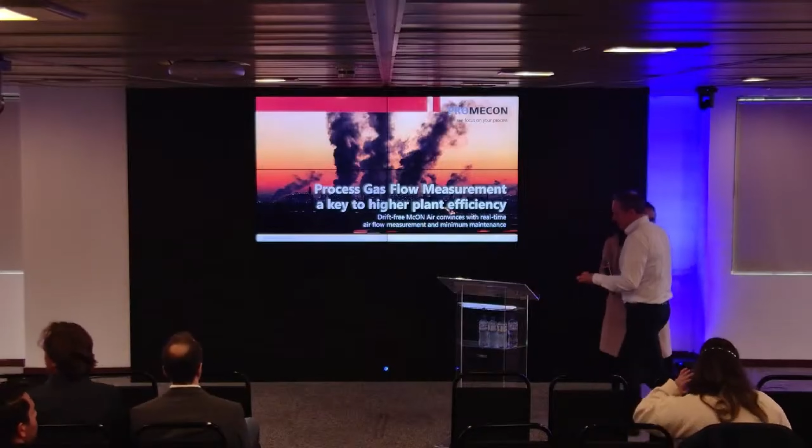Well, thank you very much for coming here. Thank you for your time. I know that you also have other things to do. Very happy to be here. First of all, I would like to say thank you to Carlos, C2E in Brazil, for providing this wonderful venue and also inviting all the people. Also for providing us the access to the Centec show, which was great.

And today, indeed, I want to talk about optimization of thermal process. And the focus will be on process gas flow. Now, this is a very wide field. When I read the title, I said you can actually talk many days about this because there are many types of optimization you can do. So I will try to pick out some important process parameters in some industries that might be of interest to you.

Now, I would like, before I start, maybe you can raise your hand if I call up certain industries. Anyone from the cement industry here? Anyone from pulp and paper? Okay. Anyone from glass? No one from glass. Anyone from power? Which other industries come to mind? Steel making, metallurgy. Okay, very interesting.

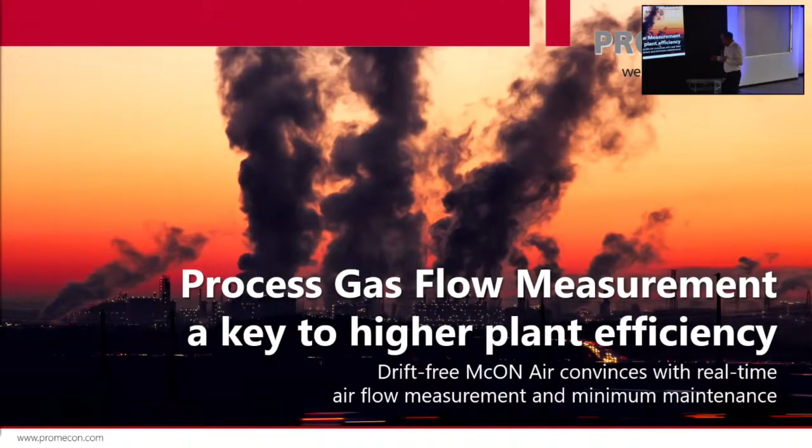Our company is basically doing process gas flow measurement. That's pretty much our DNA. We do process gas. We were started in 1995, so we have a 30-year anniversary, and tonight we'll have a little bit of a party with some of our partners that joined us here from South America. And we are located not far away from the city of Berlin, about 1 hour west of Berlin in Germany. And we are providing the measurement of process gas for these industries that you can see here.

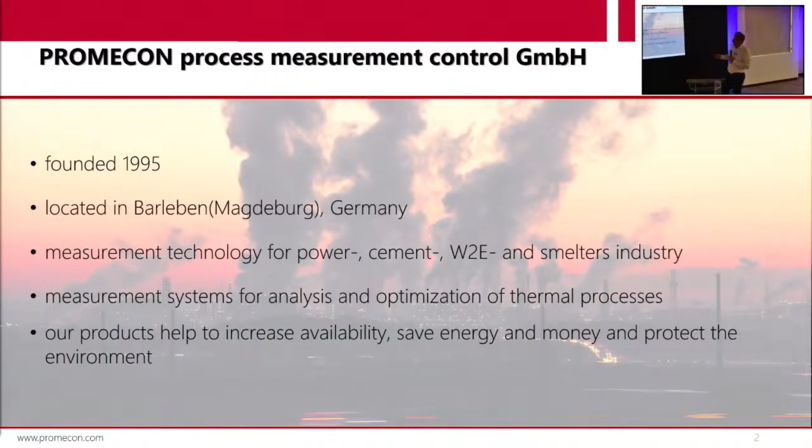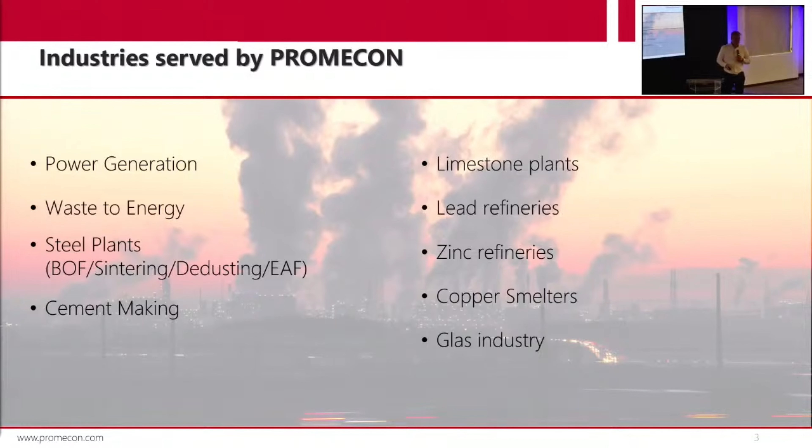Basically, we started in power generation, measuring the combustion air to large boilers, to large furnaces. But also, we expanded our activities to cement, to lime production, to steel, but also to non-ferrous metallurgy, so copper, zinc, lead. The main industries that we have been into so far are basically power, steel, and cement.

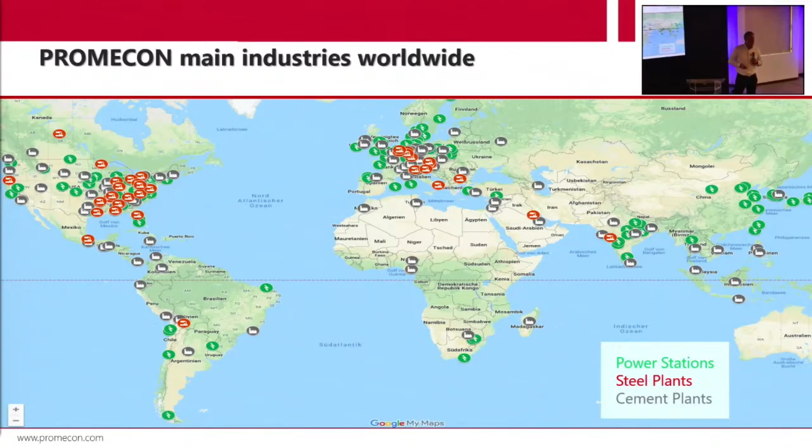This is the big one. But when I say power, it's also boilers, industrial boilers. So if you have a paper plant, you have a black liquor boiler or whatever, that would be a similar thing. Waste heat recovery boiler, same thing, right? And you can see we have been focusing a lot on Europe, a lot on North America. You can see that South America is still a very blank spot on the map. And I'm here today to change that. We would like to sell more in South America. Brazil is a very big economy, but other economies as well are very highly attractive to us.

Now, I would like, first of all, to address a little bit more precisely what is process gas. You can define anything as process gas. For us, it means gas that has high temperature, gas that contains particulate matter, so dust or some medium, and gas that goes through a large duct. When I say large duct, I mean large cross-section in relation to the length of the pipe. Why is that typical? Because usually in the heavy industries, you move a lot of gas, you move a lot of air, and you move this air at a very low density because it's very hot. So you need very big piping to transport that.

And if you want to know how much goes through that pipe, simple question, very difficult answer. It's very difficult to measure process gas.

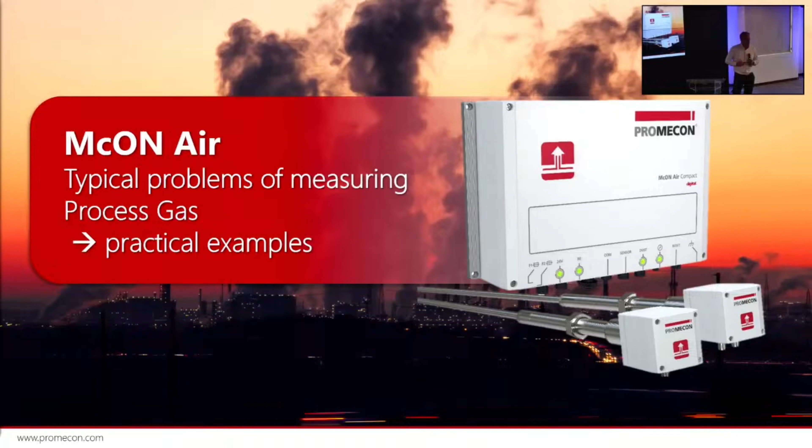We just had a project in South Africa where somebody had an 800 megawatt boiler, and they said we would like to know how much gas comes out of this boiler. This is a monster issue. It's a huge project. You have to measure 30, 40 points. You have big concentration of fly ash in the gas. And of course, if you want to look at the boiler efficiency, you have to get accuracies way below 1%. Very difficult, right? And in all other processes, it's very similar. So that's really what we have specialized in over the lifetime of our company.

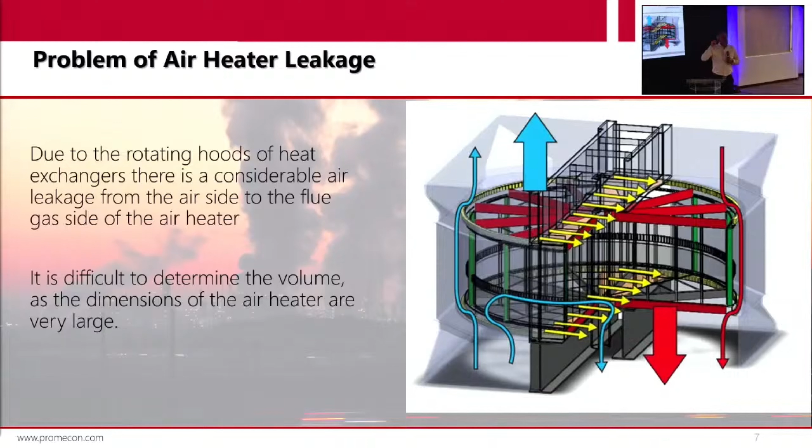And this is just one example. There are many others, but a very prominent example. You have a large boiler. You would like to put combustion air into your boiler. In order to have a high efficiency, you preheat the gas or the air with a rotary air heater. Now, the rotary air heater puts the heat from the flue gas back into your fresh air. But it also puts a lot of ash and dust from the flue gas into your air. And so all of a sudden, your air is full of particles. And these particles make it very hard to measure it. How would you normally measure air?

Most of the time, people just take a delta P measurement. So they have a venturi, they have an Annubar, they have an airfoil, something where they can use the Bernoulli equation in order to calculate the flow out of the pressure. Now, the typical example for a power station would be you have a venturi, you have a pressure tap upstream the venturi, and you have one pressure tap on the venturi, like right here. And out of the difference, you measure the flow. Now, the thing is that the pressure transmitter gives you a delta P, typically 20 millibar. This is not a lot. That's a very small pressure.

The whole thing is floating on the barometric pressure in this room. How much is barometric pressure? It's 1,000 millibar. So you have a very high barometric pressure, and you're just measuring a small difference. Why is that a problem?

Well, think of the dust I've been talking about. You have dust in the air. When you turn this boiler on and off, the dust would get cold. It would go below dew point. It would clog. This thing can completely jam. So your impulse line is completely jammed. And now all of a sudden you measure this pressure against barometric pressure. So if one leg is blocked and you have a thunderstorm coming, your barometric pressure changes from 1,030 millibar to 1,010 millibar, 20 millibar. That's the full scale of what you want to see.

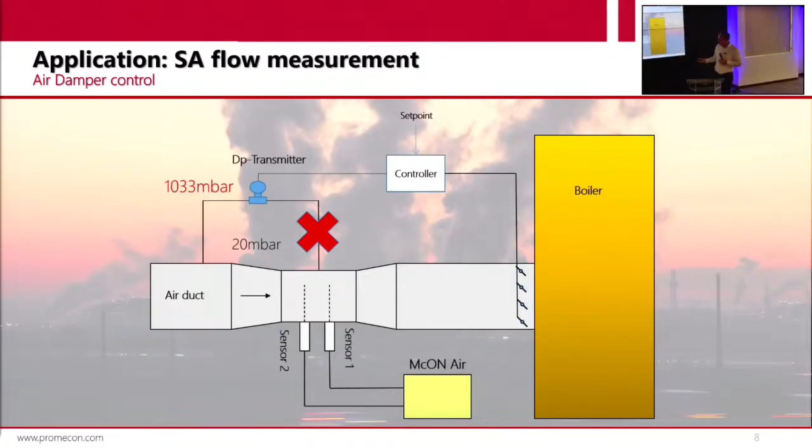If I go to a power station with 20 secondary air readings, then I'll see that the dampers are all over the place. And the flames are all different. Every burner has a different problem. And that's because all of the airflows are wrong. And this is what's costing you a lot of energy. It doesn't matter which process. If you go to a cement plant, you have a large mill, same problem. The raw mill has some airflow. Is it correct?

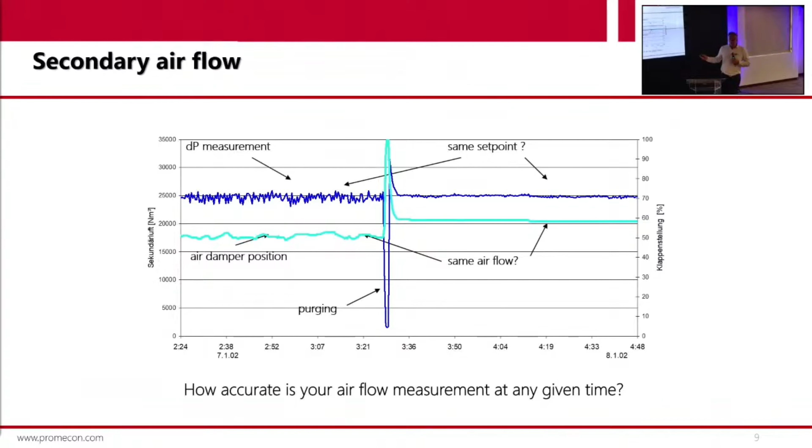Our measurement is a digital flow measurement that will never drift. Our measurement holds the calibration over the life of the system. If you buy this system, you will never have to recalibrate it. And I will explain in a minute why.

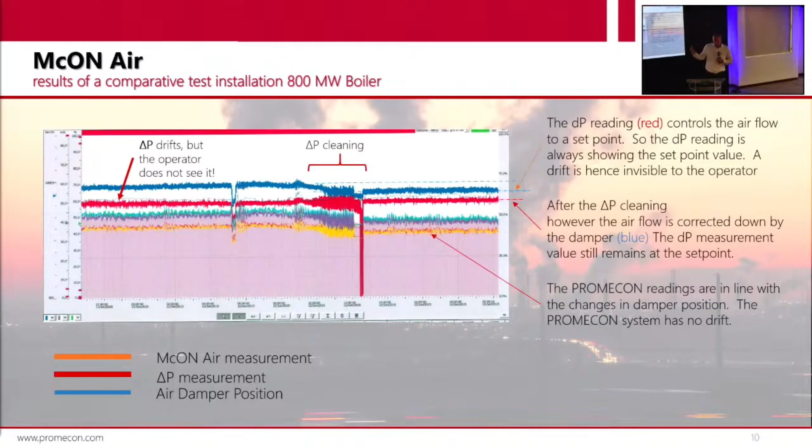If you clean the impulse line, it's gone. Now, all this trouble you don't have if you go to a digital measurement that does not use impulse lines, that does not use delta P. I'm going to show you a little bit in a while.

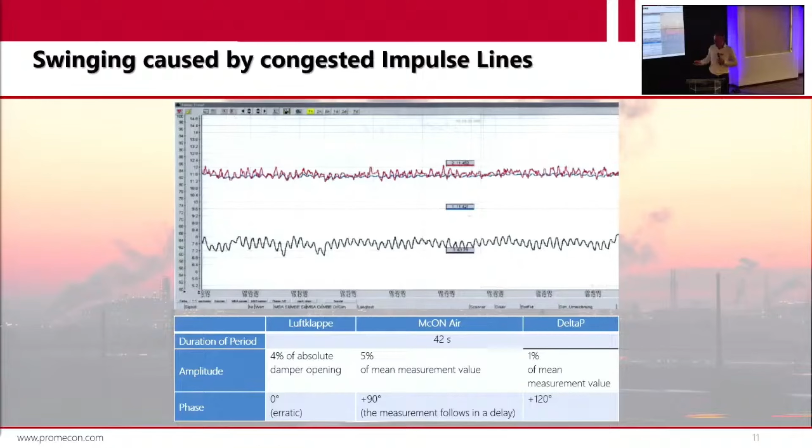So if you want to measure process gas flow, for example into a big fan, you must have a measurement that only measures the gas as a vector. You only want to know the amount of velocity in the direction of your duct. You are not interested in lateral spin or whatever. So: drift-free, digital vector measurement. That's what we do. That's what you need for process gas. I'm going to show you in a second how we do that.

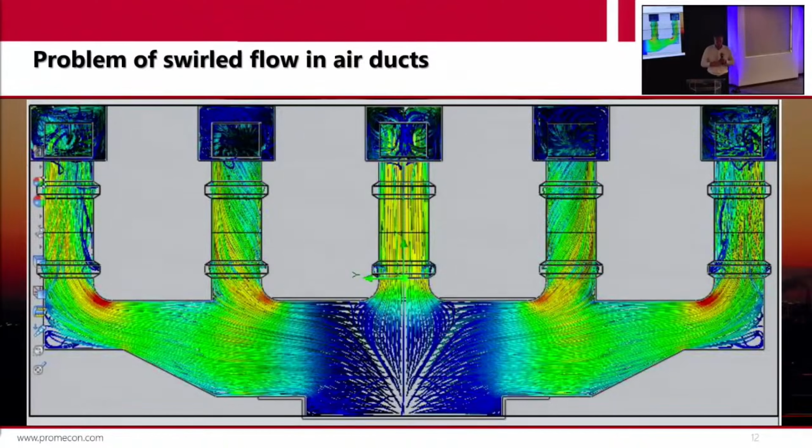As I mentioned, our measurement is digital, drift-free, and it measures the flow as a vector. So you will always see the true mass flow that goes through the duct instead of some spin or stratification that you have.

How does our measurement work? Our measurement does not use delta P. It also does not use any heat dissipation like hot wire anemometers. Our measurement is basically clocking out how fast your gas is traveling. And for this, we use two principles. The first one is the generation of an electrostatic signal, so we need to have some signal that is the basis for our measurement. The second thing is that we have a cross-correlation between two signals that we take, and this cross-correlation then calculates the time of flight of the gas.

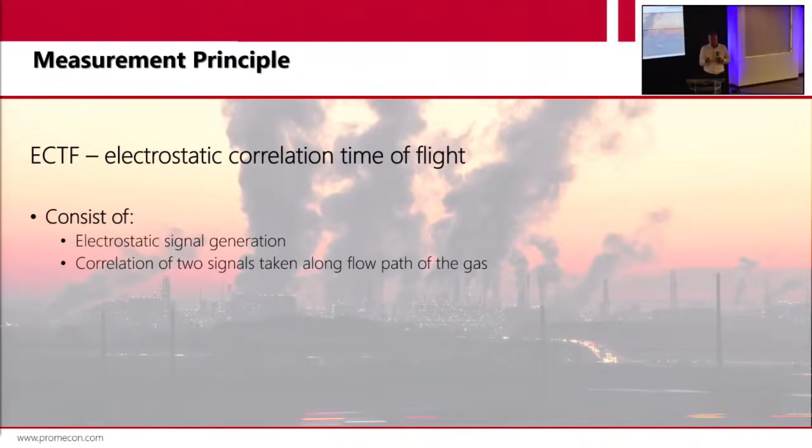Let's go into it. First of all, we have a sensor inside the gas duct. Now the gas duct carries a lot of particles, and these ash or dust particles are electrostatically charged.

The electrostatic charge causes a mirror charge on the sensor. Some of you might have heard of Coulomb's law. The total amount of charge over this whole area must be neutral. So if your cloud has a slightly positive charge, your antenna will have a slightly negative charge.

Now, as the gas flow progresses, you will have clouds of positive and negative charge flowing by your sensor, so you will have a change of charge over time. What is change of charge over time? It's electrical current, right? So you just measure an electrical current over time.

Why is that so important? The clouds of dust that come over your sensor are basically random, so you don't see any function, you see a random signal. It's like a fingerprint, a very characteristic signal that you can see here. We call this a time signature. In the next second, there will be a completely different time signature, and then another completely different time signature.

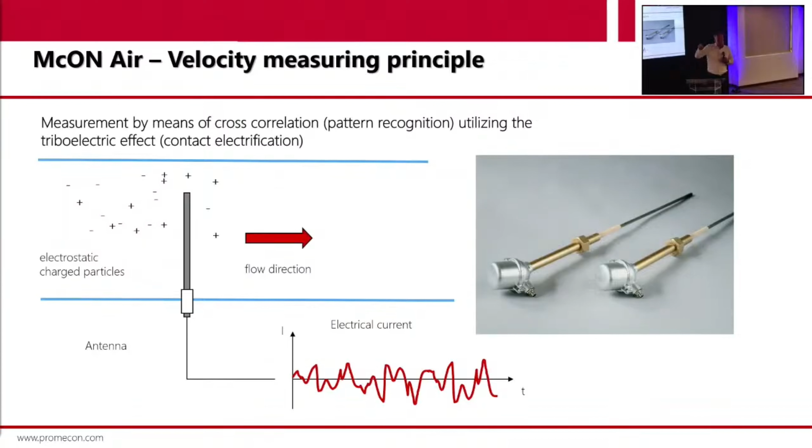So the clouds leave a characteristic signal on your sensor, and that is important because the characteristic signal contains information. What information is that? We basically take two sensors in series, sensor 1, sensor 2. If you put them close, like 300 millimeters, then the time signature at a certain time on both sensors will be very similar. The flow pattern does not change within 300 millimeters, right?

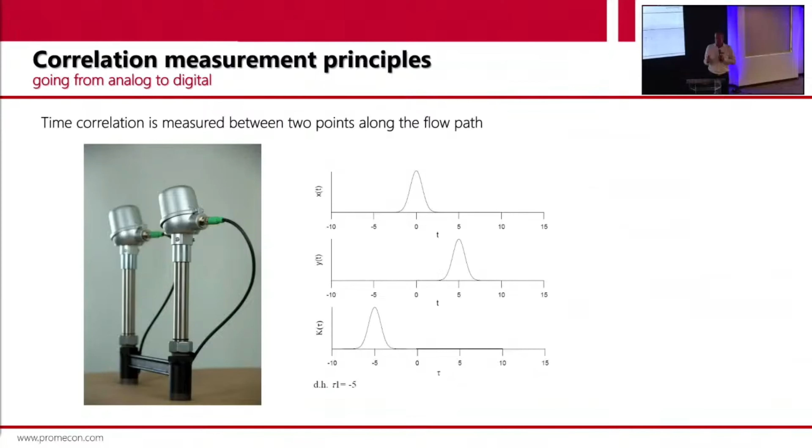Let me show you that. There we go. Two sensors, and now you have the dust going by. And this is basically how it looks like. Sensor 1, sensor 2. So both contain the information about how the dust went by the sensors.

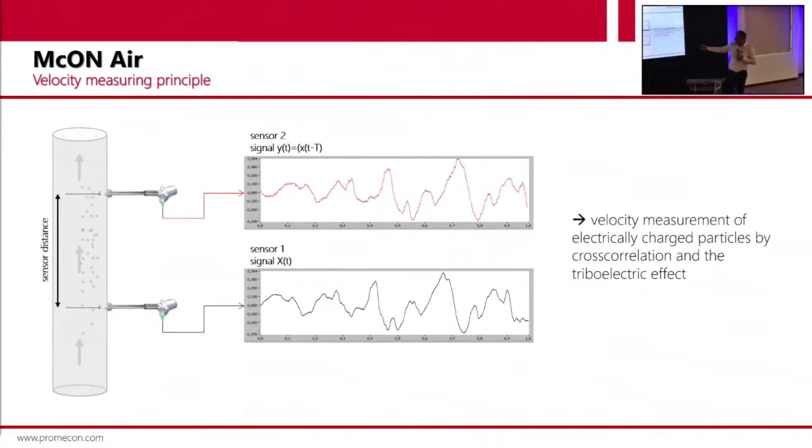If you put these two on top of each other, you can see they are very similar. Of course, they are time shifted because the sensors do not sit on the same location, right? You do have a time shift between the two. And that's the whole thing. We are now using basically the two signals to mark a certain time on each sensor.

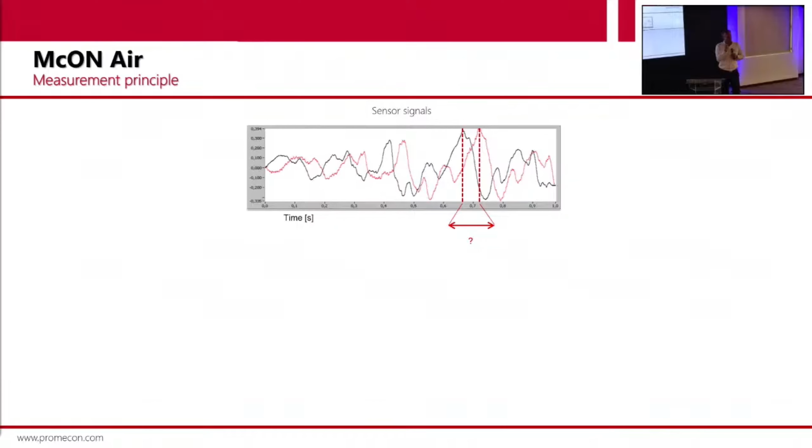So if you put those two signals into a cross-correlation filter, you will get a cross-correlation function. What is that function? This correlation function measures the overlap of the sensors. How much is the overlap? You can see here the overlap is not very big. But if you shift the two functions, you will get to a point where the overlap has a maximum, right? And that means at a certain point in time, we know the time of flight from one sensor to the other. We're just clocking it out.

And by this measurement, the dust, which is usually the natural enemy of flow measurement, becomes our tracer. We trace the gas velocity by the dust.

The big advantage of this measurement, of course, is that you have a digitized signal. The only variable that you have is time. So you have the two sensors with a fixed distance, and you measure time shift. And time is the most accurate measurement that mankind ever invented. There's no doubt about time.

So that's the reason why once you have this, you will never see a drift. You will never have to adjust for zero, right? If the velocity is zero, the time from sensor 1 to sensor 2 is infinite. There is no zero. So it's a very linear calculation of flow.

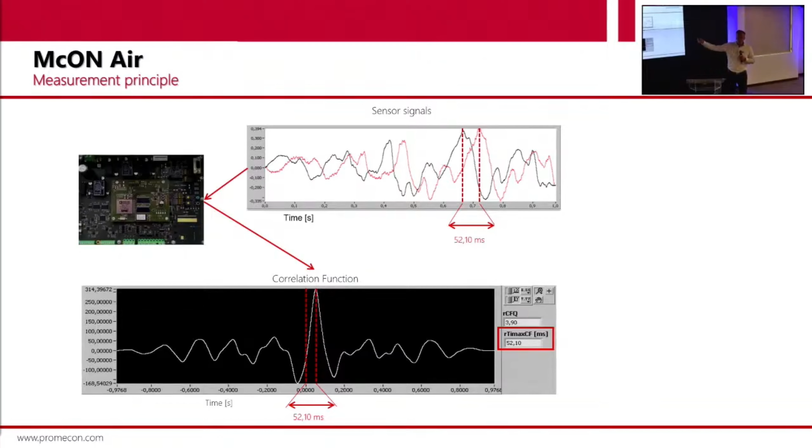The typical thing you have to purge and clean, the delta P measurement, you don't have with PROMECON. Our system will run, and we have several clients that forgot where the sensors are positioned because they never have to look after them. The sensors are in the process and they stay there.

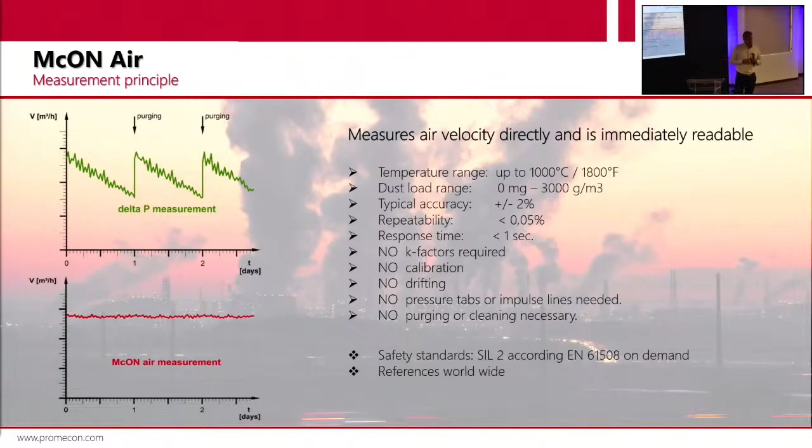And that's the biggest advantage of this. Now, I've explained digital and drift-free.

What about vector? What about the fact that we're measuring a vector? It's very simple to explain. We are measuring a time shift. Now, you might say a time shift is a scalar value, there's no vector in time. But we divide the distance of the two sensors over time, and the distance is a vector.

What distance do we mean? We mean the vector that is orthogonal or perpendicular on the two sensors. If you have a flow that goes in this direction, we will only give you the velocity in that direction, nothing else. So you have a directed flow, and our measurement, by this reason, is insensitive to swirl. And this is very, very basic.

If you have a delta P measurement, or a nozzle, or a pitot tube, and you have swirl, you can be off by 20%. And nobody can tell you why.

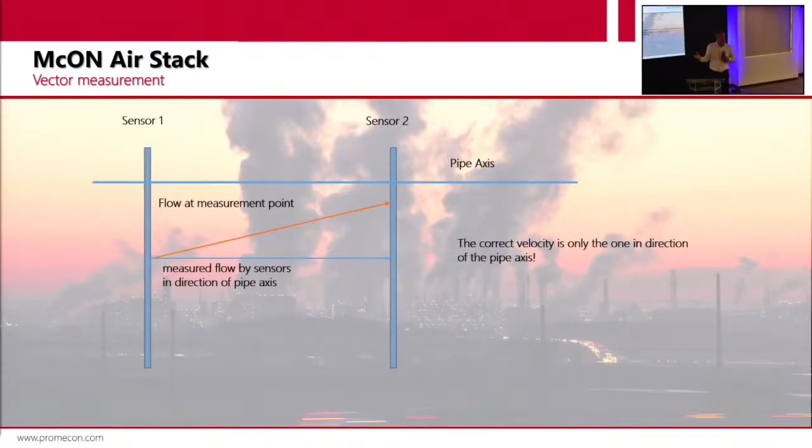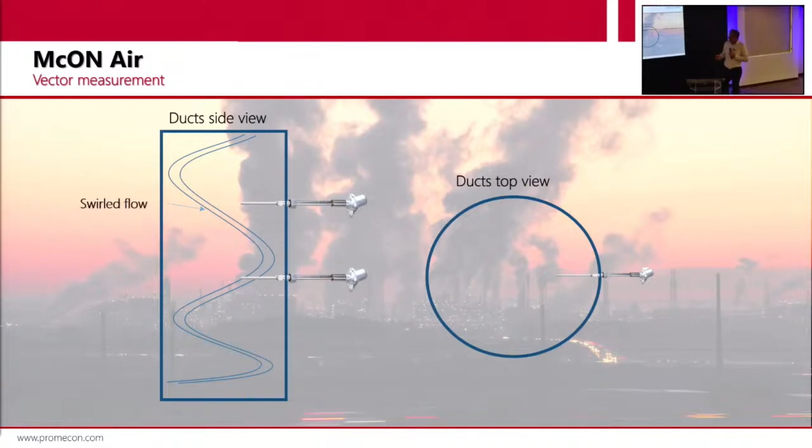Let me show you this. That typical swirl, you would have a swirled flow. The swirled flow is not what we see. We see only this. That's it.

Especially in stacks. We had an audit by Deutsche TÜV Süd, and they told us it's the most accurate measurement in the stack they've ever tested, because it's not sensitive.

On each stack, you have a large fan, an ID fan, which swirls the air around. If you look at the plume of the stack, you can see that it sometimes swirls out. There's always swirl in a stack. And I would say 90% of the cheap pitot measurements in a stack are completely wrong. Nobody can check it. So that's the big advantage of measuring a vector.

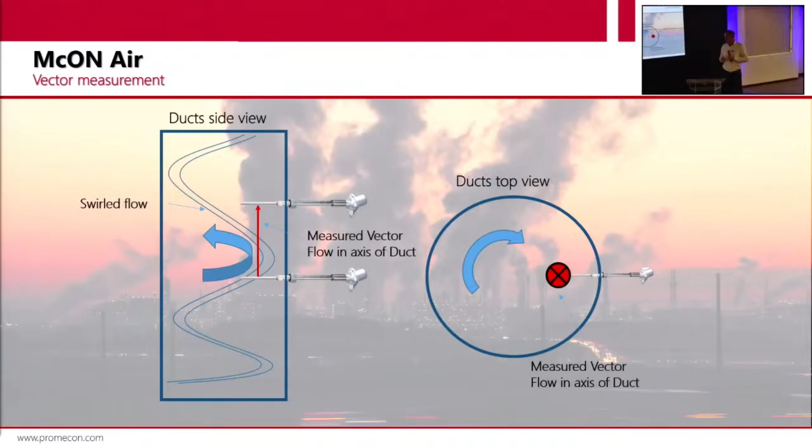Now, I would like to go into typical applications, and there are so many applications that maybe you have to help me come up with some good new ideas. The main applications that we have done, I can show you, and I can show you what people can do with it. First of all, we have to remember that moving air around in heavy industry is a big cost factor.

Take a cement plant, take the grinding plant: the amount of energy that you need for all this, half of the energy is used for fans. Half of it. So forget the grinding power and all that, it's just moving air from A to B.

If you have a large raw mill, you can have a fan of a megawatt. Or if you have power stations, you have an ID fan with 5 megawatts. Okay, let me just see if I can fix it.

So in a power station, where is the airflow of importance? The airflow is of importance here when you put the air into your pulverizer. What if you have a wrong airflow into your pulverizer? You have the wrong grinding because you blow the coal out too fast. You have the wrong transport velocity of your coal from the pulverizer to your burner.

Huge amounts of problems that originate. And I can make a bet, if anyone has a coal-fired power station, you send me the printout, the screenshots of your current mill with airflow, delta temperature, and coal flow, and I will prove to you that at least 1 or 2 mills are wrong. It's very easy, you make a mass energy balance over the mill, and you see not every mill is the same. And the reason is that your airflow is wrong. Airflow is a very big culprit in this whole thing.

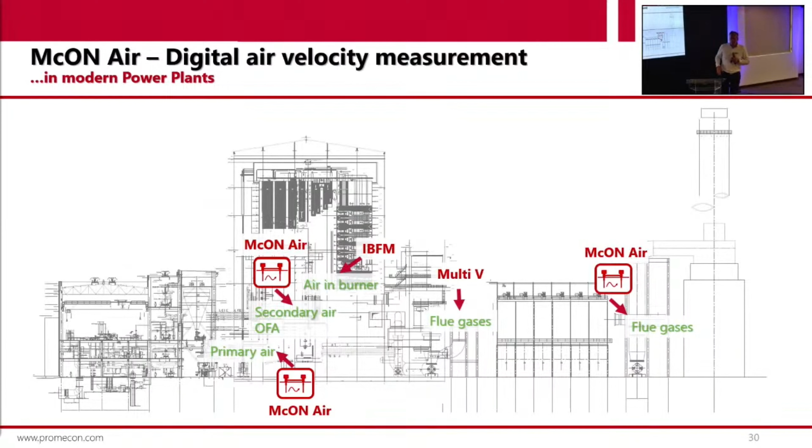I would say power stations are a super example of what can go wrong with airflow. And I can say after 30 years in this business, airflow is the most neglected measurement in power stations, because everybody tries to get it right. They have an O2 measurement at the end, which is of course important, very important, but they don't know what's happening inside the boiler. Big problem.

I'm not sure how far this applies, but when you look at waste to energy plants, it's the very same thing. You have an undergrate air, and very often people don't know, when you have the burning grate, where does the air come through? You have high airflow here, low airflow there, you have hot spots, you have NOx problems, you have higher wear rate on your grate.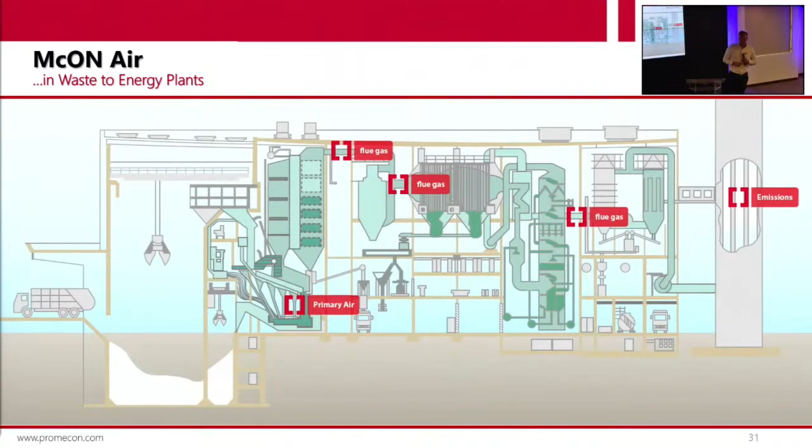So all sorts of problems. And then, of course, measuring the raw gas into your scrubber units and into your flue gas cleaning systems - nobody measures this, but it would be very important. People don't do this because it's so difficult to do.

And then, of course, cement plants. Don't get me started, cement plants are moving so much gas around. Let's start at the beginning, the raw mill. I would say in many cement plants, the raw mill is overdrafted.

When the gas flow in a raw mill - these raw mills are big, I'm not sure if you're all familiar with cement plants - these raw mills grind 300 tons of raw meal per hour. They are as high as a 5-story house. It's unbelievable. And if you have not enough air in the raw mill, your raw mill can trip. And then you have a huge amount of raw meal lying on the bottom of the mill that you have to get rid of. It's the monster thing that nobody wants to have.

Big problem. Usually, how much material would that be if the mill trips? It's usually 5% of the hourly throughput. So if you have 200 tons and it trips, you have 10 tons of raw meal that you have to get rid of. So operators like to overdraft the mill.

It's better to put more air through the mill than necessary. Now, we all learn the fans that are pulling the air through the mill - the power consumption goes up by the third order of flow. If you pull 10% too much gas through the mill, you are like 27, 28% too much electrical power. And with a fan, that is a megawatt. So that is a big issue, you can save huge amounts.

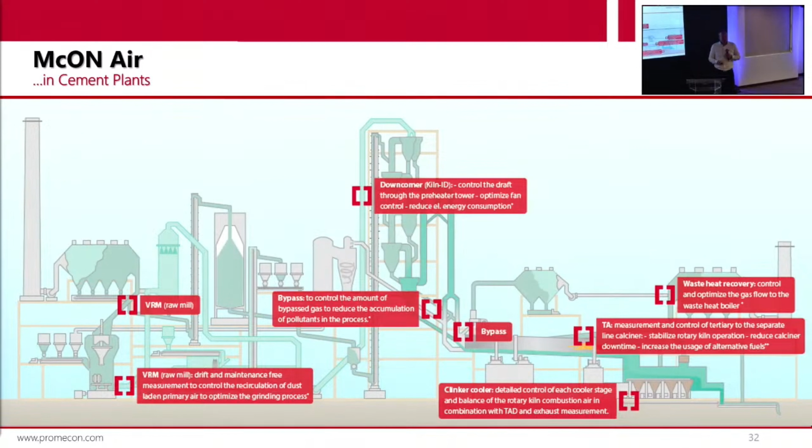In a cement plant, there's gazillions of things. But the typical application would be also for boilers, heat recovery boilers, or for any refining process that you have - copper plants, roasting, calcining, refining. In all these steps, you would like to know how much flue gas am I putting out of my process and how can I optimize dedusting, fan power.

Here we come to the steel industry. Steel industry really falls into two fields. One is the cold side, which I'm talking about today - cold side is anything up to 600 degrees C. And the hot side, which is this one, that is up to 2000 degrees C. In the cold side is mainly the primary, secondary dedusting.

Typical application, you have an ID fan. You have 2, 3, 4 ducts that are coming into the ID fan from all sorts of parts of the process. On all these ducts, the dust level is not constant - sometimes it's high, sometimes it's low. But usually this fan is pulling all the time, so you're putting way too much gas through your cleaning system. Why is that bad? Particulate emission, number one. Fan power, number two. So if you have a better handle on how much goes through each of these ducts, you can manage and reduce the total flow significantly, and by that lower fan power, lower your emissions.

On this side, again, I could have another presentation on that. We have developed a system that can measure the flow out of the furnace and the gas composition out of the furnace, so we can tell you how much CO and how much CO2 comes out of this furnace. Why is this important? The operator can see how much carbon comes out of his furnace, and he can reduce the power-on time of the furnace. He can reduce CH4 injection. He can reduce carbon injection. This is a monster thing.

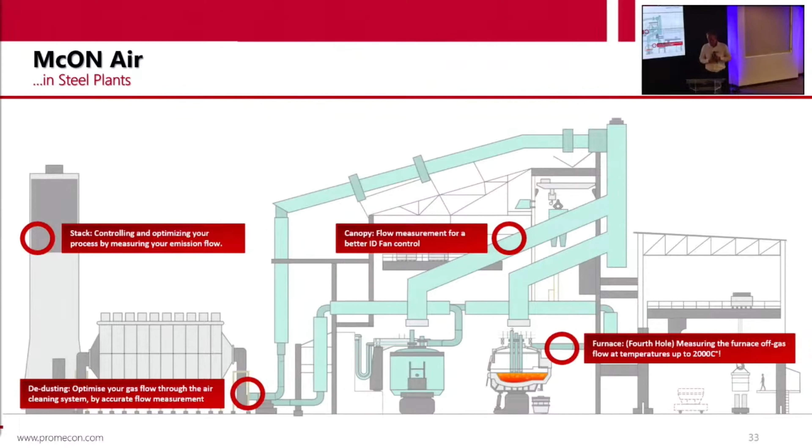We installed our sensors here. There's a retrofit, and these are the boxes. This had to be all SIL 2, so the whole measurement is SIL 2 certified because of boiler safety and everything. Client very happy. We've installed these on many boilers worldwide in order to get rid of the problem of drifting flows.

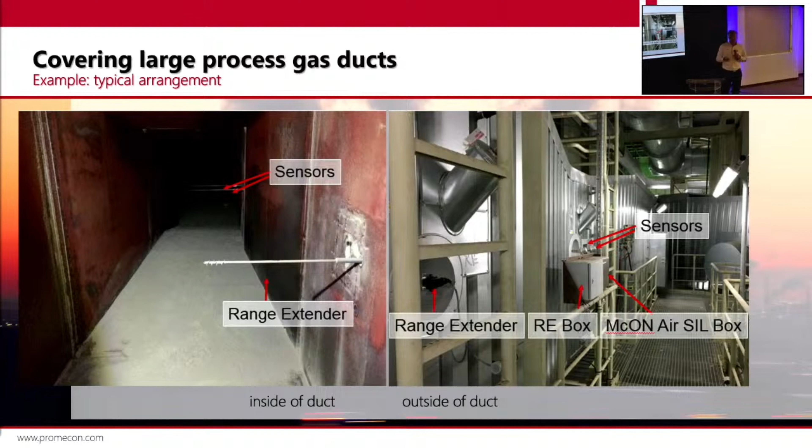Here's another example where a new boiler from Mitsubishi Hitachi was retrofitted - or not retrofitted, it was equipped with our system from the beginning, because the client insisted on this measurement instead of the old technology.

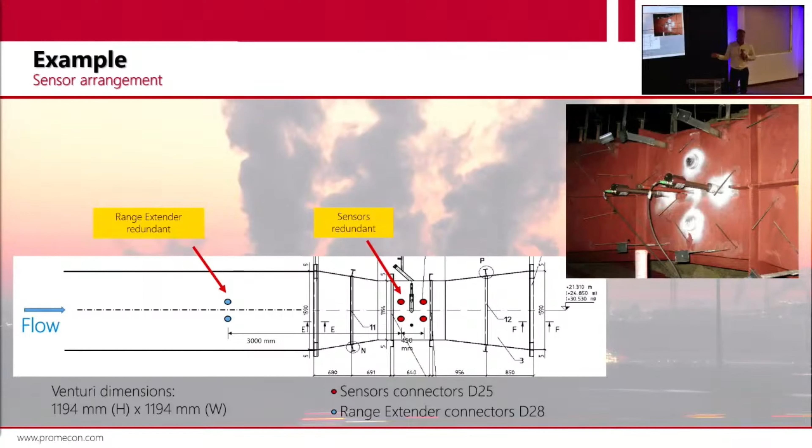This is a very big project we did in Chile many years ago. There was a big problem with electricity that Chile had with its boilers. They wanted to optimize the output of the boiler and the efficiency, and for this they needed to measure the total gas flow out of the boiler. These are monster projects on gas flow, because look at how short these pipes are, and you have to be able to measure them very precisely.

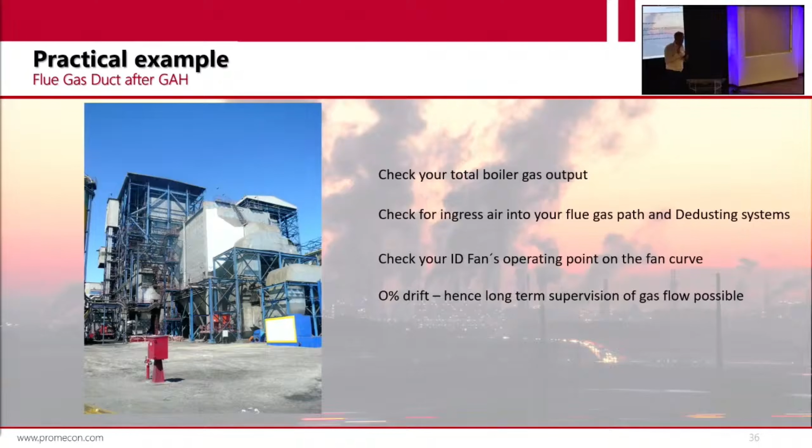Precipitator. Why is that such a problem?

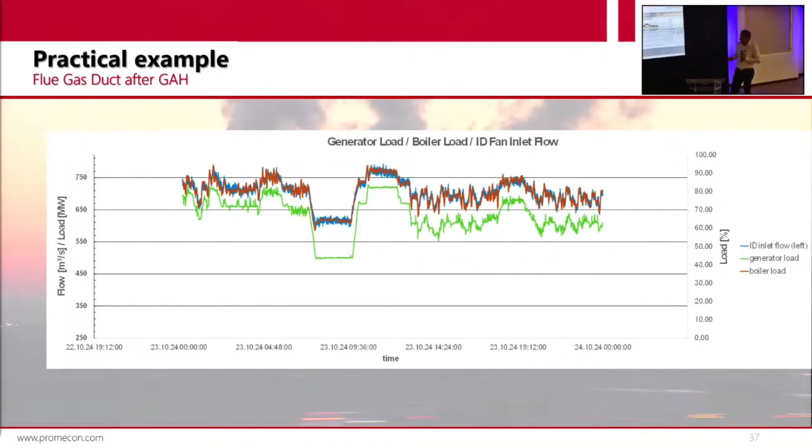Here's another example. Another application for this is to test your scrubbers. We have a big project in South Africa where the scrubbers are falling apart, and there's a huge fight between the boiler maker and the flue gas cleaning engineering company who made the mistake.

The engineering company says the gas flow out of your boiler is higher than the specification. You put more gas through your boiler, your boilers are basically too small. And the result is that the flue gas scrubber gets too much gas, it can't clean it. So part of the lime injected is blown out at the other end, and it settles in the chimney duct, and the duct falls down, and it's just a disaster.

So we had to measure very clearly how much goes through, and of course they want to know it down to the percent over a long time. Without a drift-free flow meter, you can't do this. This is the only way to do it. Frankly, I would say we're pretty much the only company in the world who can do this over a longer period of time, because you need this technology to do it.

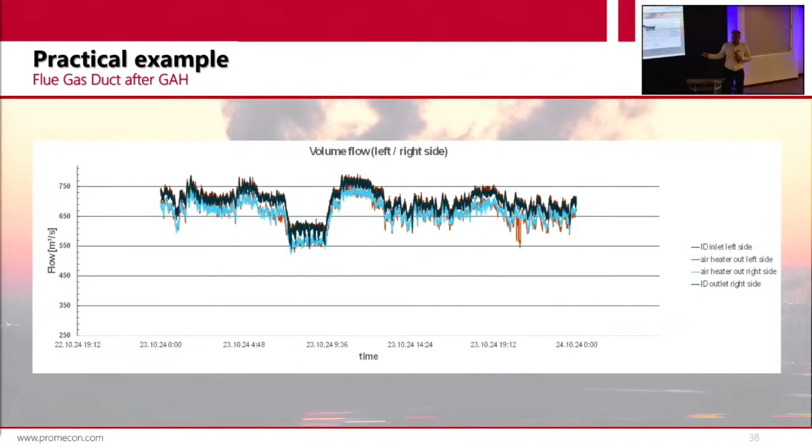And of course, the big issue is how do they find it? When you talk to fan companies, you talk to Howden, or Venti Oelde or TLT Turbo, none of these fan companies have an idea of where their fans are operated on the fan curve, because they have no way of measuring the flow through their fan correctly. This is very difficult. If you have a power station with a big ID fan, and the gas flow hits the ID fan with a slight spin in the opposite direction of the fan rotation, your fan performance goes all the way down.

If you take a plant, you will find the most amazing flows. It's an unseen problem, and it usually goes along with fan operation that is wasting energy, that is not correct. It can be as bad as replacing your fan wheel with a better one. But even with new plants, very often there's a big fight, because the fan curve is not only depending on the inner fan curve, but also on the system curve - the curve that comes from your plant, from your ducts. Very often there is a mismatch that is not projected correctly. And the only way to find out is to measure. To measure is to know. If you can't measure it, you're stuck. There's no way around it.

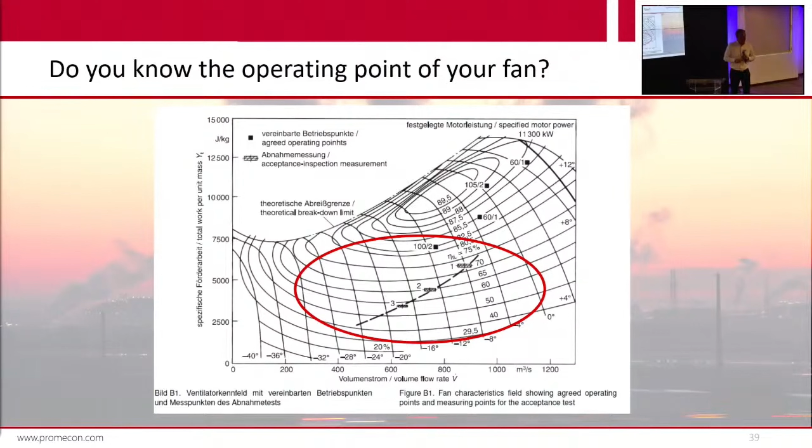Technical spec. It reads a bit like measurement principle: cross correlation, measurement range... I'd say 0 to 100 meters per second. Now, 100 meters per second is a practical limit. With this correlation principle, you could measure transonic, you can measure any high velocity, there's no end at the high end. But 100 meters per second is already so high.

And then no drift, no cleaning, linearity 100%.

Accuracy, that's usually where all measurement companies start to lie. Accuracy depends, of course, on your installation conditions. To be accurate, you need a certain representativity of your measurement, and that depends on the stratification of your flow. So you have to get rid of stratification, for example by an airfoil or a venturi, or you have to have multiple measurements and average correctly. These are the two ways of getting the accuracy right.

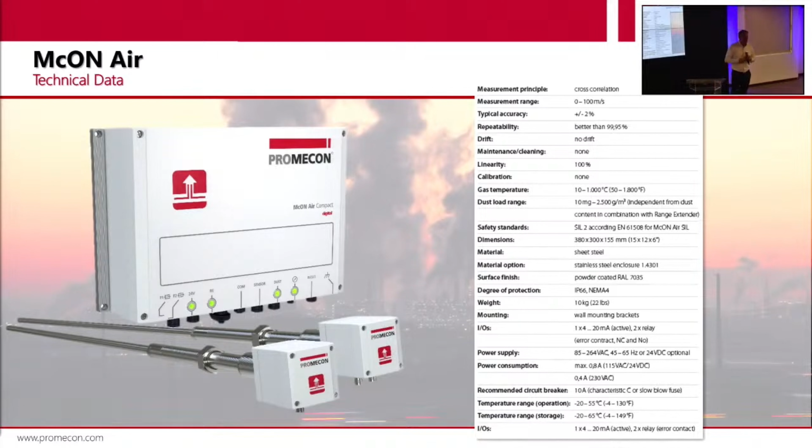What do we do with clients? Usually we ask them to send us a drawing, we have a look at it, and we may do a CFD to fit the sensors in the right position. But for many applications we already know where to put the sensors. We've done this for 30 years and we know how to position them well.

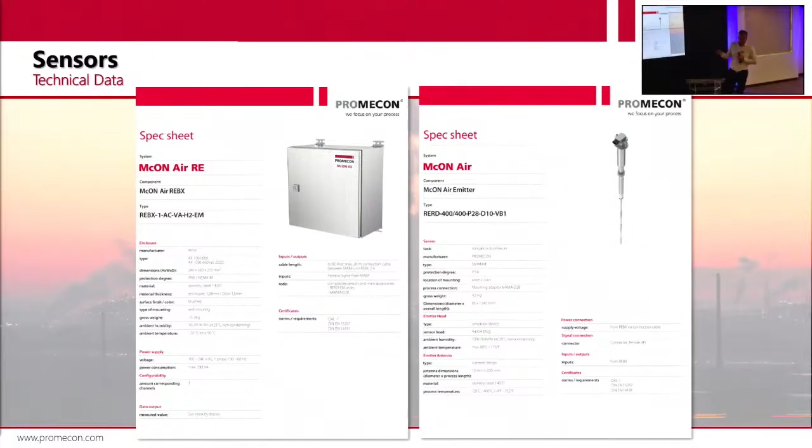More sensors, more stuff, I won't bother you with that. We'll send you some more details.

One thing interesting: this is not a long sensor, it's a sleeve, and there's an infrared diode on top here. That's our new wonder sensor. We can measure the velocity, but we could also measure chemical composition. And chemical composition here is not like Durag said, down to ppm or ppb - this is the other end. We are measuring percentages: 20% CO2, 30% CO.

When you have a steel furnace and the temperatures are so high, all the CO2 falls into CO because the high temperature destabilizes the molecules. So you have excessively high CO, and you want to know the CO and CO2 to make the carbon balance. So this is what we use this for.

This is not an emission sensor, this is a sensor for process. We are process people, we are not CEMS people. For CEMS you have to go to Enotec, you have to go to Durag. We are process people, we are only interested in process. The more difficult, the better - we like it very difficult.

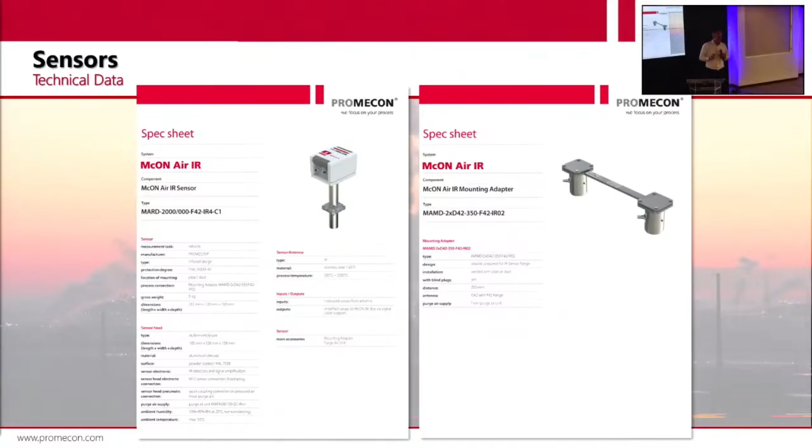Okay, that brings me to the end. Thank you very much for listening. I hope I could give you a little bit of a splash. This whole thing is so complex that I could keep on talking forever, but I will stop now, and I will be happy to take some questions if you have.